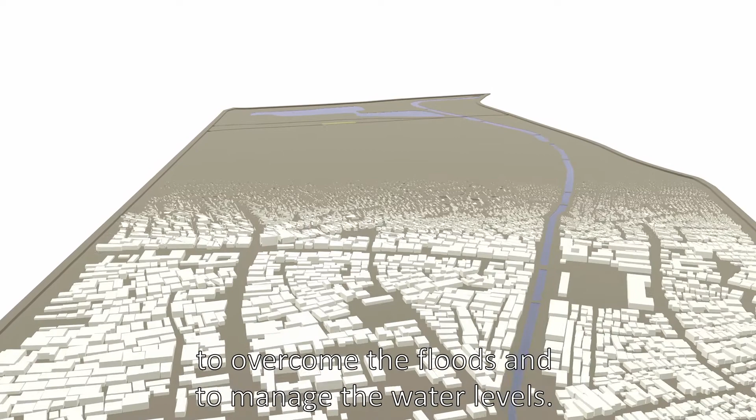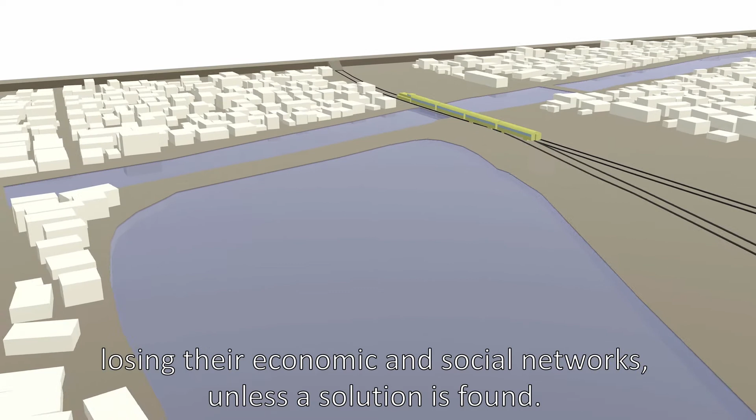Banger Polder, an area in Semarang, Indonesia, with very high population density, is being established as a Dutch polder system to overcome floods and manage water levels. Part of this project is a 12-hectare retention basin. Most people who have lived in that area live below the poverty line. When the basin is realized, those people will have to move, losing their economic and social network, unless a solution is found. That solution can be in the form of floating housing.

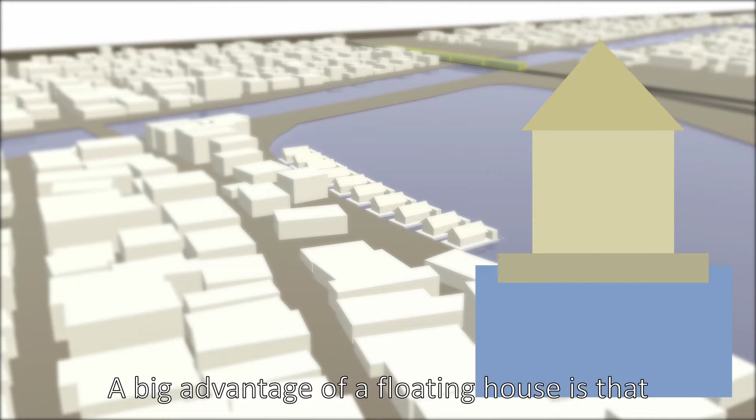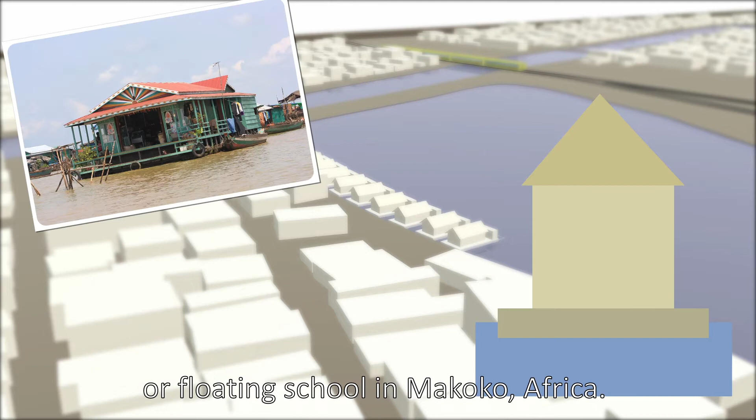A big advantage of the floating house is that it rises together with the water level when flood happens. There are many floating houses all around the world, such as a floating village in Cambodia or a floating school in Makoko, Africa.

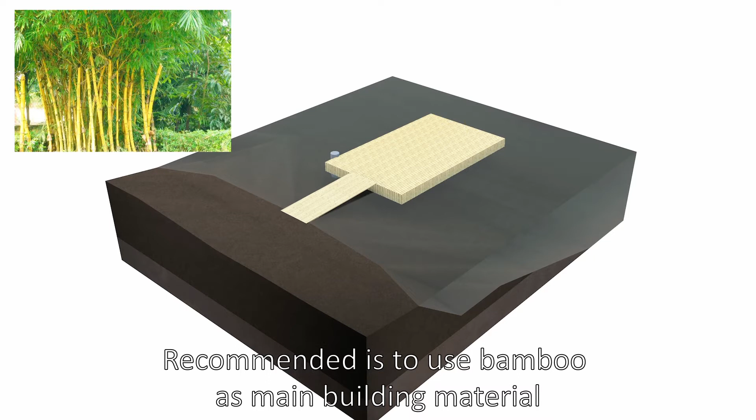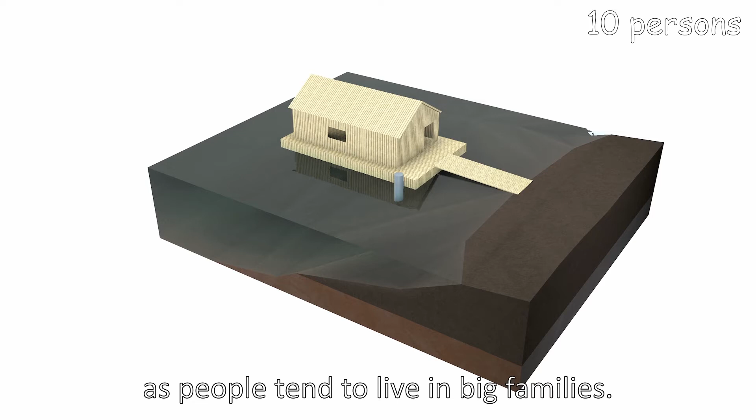In Semarang, a floating project can consist of the following elements. It is recommended to use bamboo as the main building material due to its local availability and easiness to replace. Generally, a house must be designed for 10 persons as people tend to live in big families. A house must have a place to pray because people in Semarang are mostly Muslim, with separate restrooms for men and women and at least 2 bedrooms.

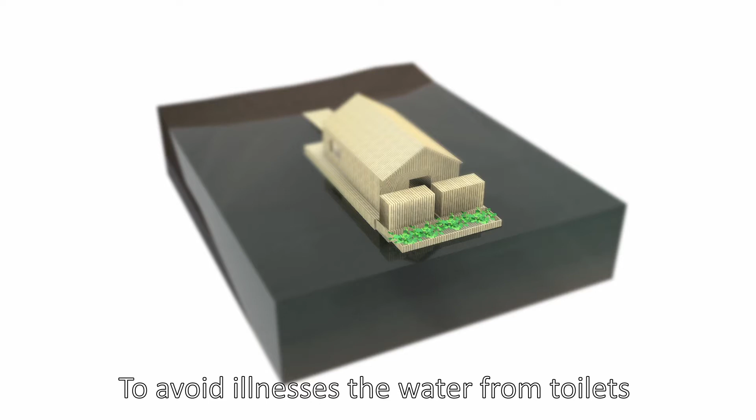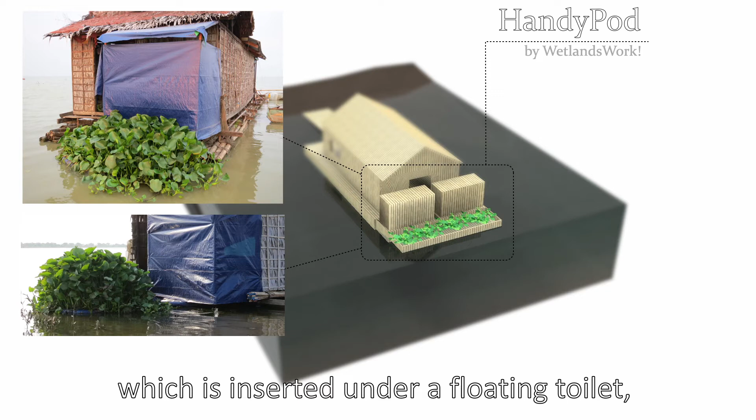To avoid illnesses, the water from toilets will not be directly discharged into ambient water, but will be treated by a system called HandyPod, which is inserted under a floating toilet, capturing the sewerage and treating it with microbial and ecological communities enabled by the plants and their root systems.

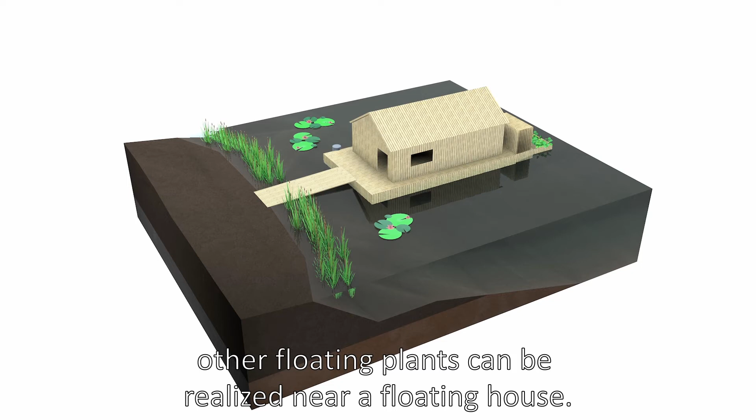In order to further improve the water quality, other floating plants can be realized near a floating house. Additionally, the installation of 1 to 3 solar panels will be sufficient to meet basic energy needs.

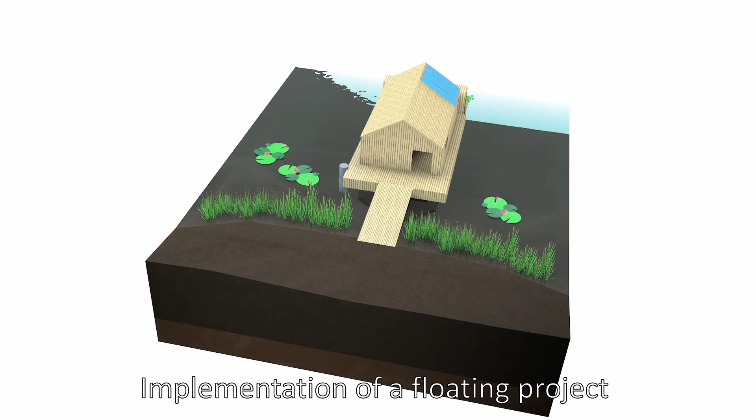Implementation of a floating project will not only create additional residential space, but also stimulate local jobs, such as garbage maintenance or carpentry, and provide opportunities for new jobs such as fishing or even floating agriculture. All other aspects of the floating house can easily be solved technically to provide a safe and sustainable floating community.